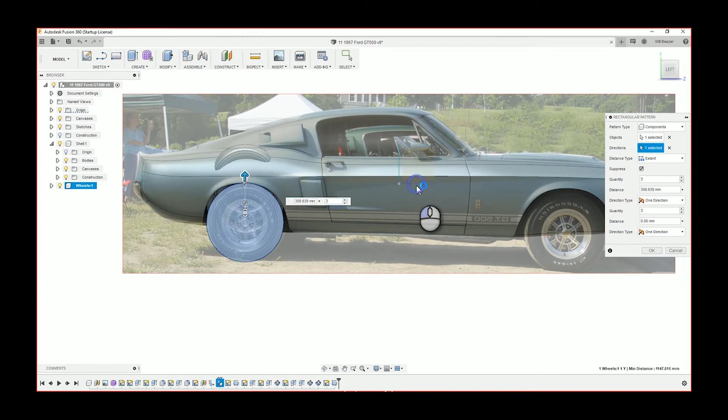This episode is going to have a lot of lessons in it. I made a lot of mistakes.

So, first mistake: when you've created the rear wheel like I have, I've created the rear right wheel, and now what I want to do is create a second wheel that's identical for the front right wheel.

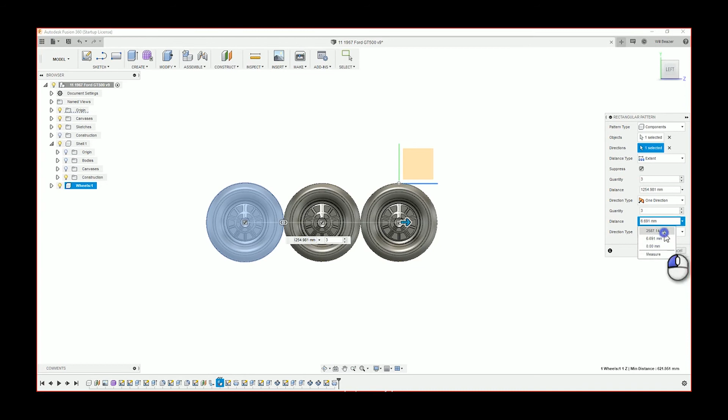So instantly I've gone into the pattern tool, and at the time this was a tool I used a lot, so I just assumed I'd do it this way. I now know that the move/copy tool is a way better tool to use, but I thought I'd show this anyway. I've cut out about 7 minutes of wasted time in this video, so it's cut down anyway, but even this, what I'm doing now, is the wrong way to go about it.

So, what I'm trying to do while I'm frantically clicking on screen is I want to be able to pattern the wheel across in 2 directions. Usually when you click a line, you get an arrow to the right on the axis you've clicked on, and then one perpendicular to it.

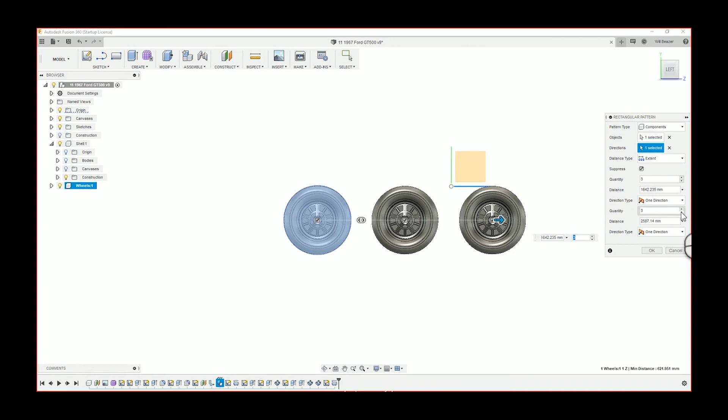In this case, it was actually going away from my point of view. It wasn't going right and up, it was going right and away from my screen, but I couldn't see that, so here I am trying to click up and get it to work. But as I was saying, this is just the wrong way to go about it.

It's just going to cause me more and more issues the more I try this.

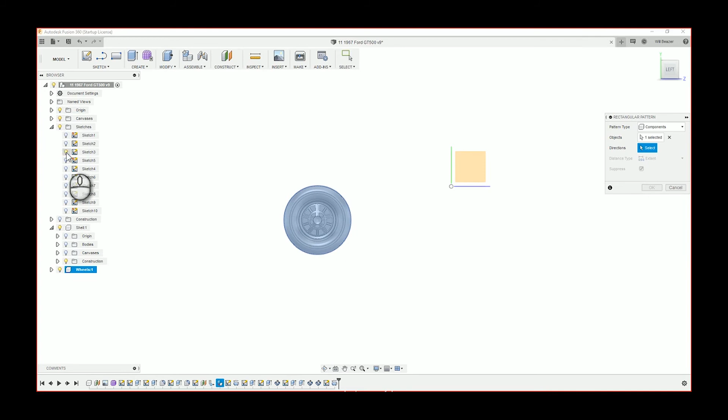At this point in time, I just wasn't really big on the move tool. I'd used it, but I didn't really understand its full capabilities, so whenever I wanted to duplicate something that was near it, I would pattern it. I now know, unless you need a pattern of wheels, that's stupid.

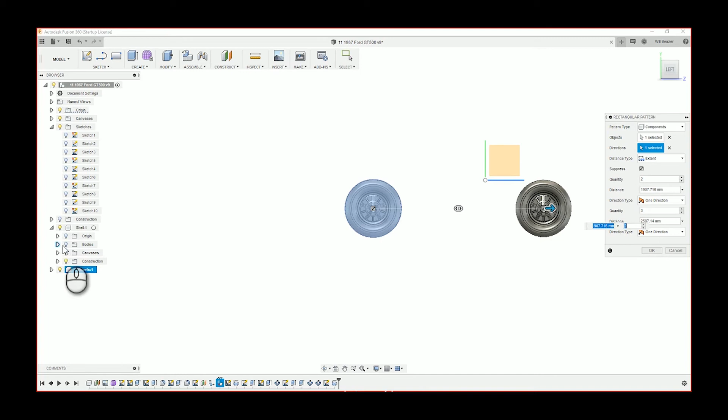But you see why I was having the problem when I turned this canvas back on. As I drag the wheel across, you can see it's actually sitting higher than the wheel on the image, and I want to drag it down as well. Even if I'd just clicked OK now and then moved it, I would have fixed it, but instead I was trying to get it perfectly accurate.

Watching back this video frustrated me, how ridiculously I was going about it.

So in this video, in about 20 or so seconds, I'm going to cut to a video I've just created today, just to explain how I was trying to do it, the actual way I was trying to do it, and the proper way you should do it. I'll be on screen in about 3 seconds.

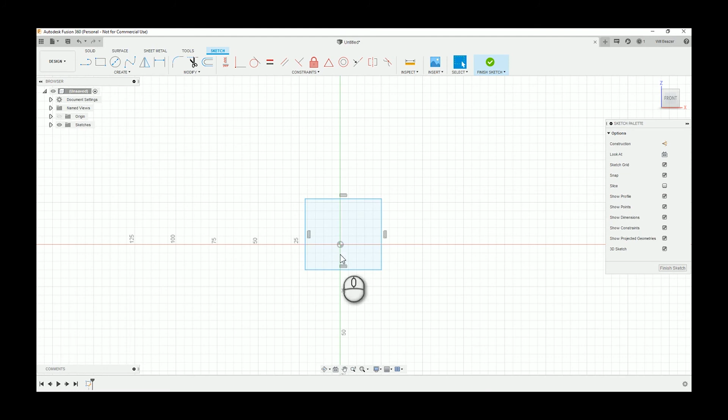So here we go. Right, I've just drawn a blank rectangle, and I'm just going to extrude it into a cuboid, any distance. I'm not looking for a particular measurement, just picture this: think of this cube as the wheel I'm trying to move to the front.

So the way I've been going about it is like this: I go to rectangular pattern, and I then select bodies instead of faces.

What I was trying to do is, by clicking the direction, you'll see I have 2 arrows there, one to the right and one that goes vertically up, and for some reason it wasn't happening in my other model. So what I was actually trying to do is create these.

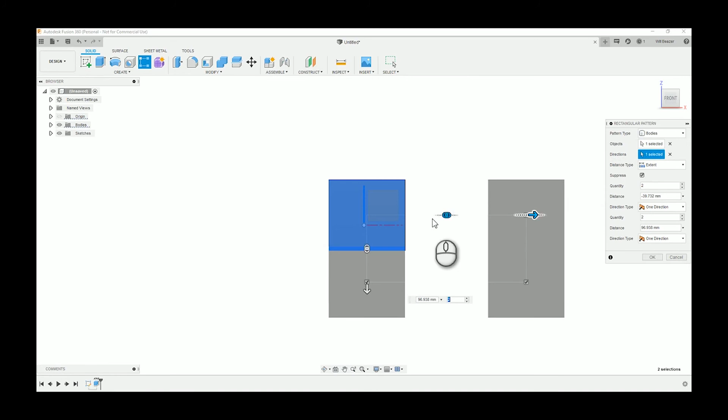So I'll move these cubes across a sec, spread them out a bit more.

Now if you look closely, in the center of the 3 new cubes, there are little tick boxes. If you tick those boxes, it actually turns off the cubes. So you can do a rectangular pattern, but you'll see in a moment. Sometimes they're a bit awkward to click, which frustrates me. But there you go, see how I turn that one off?

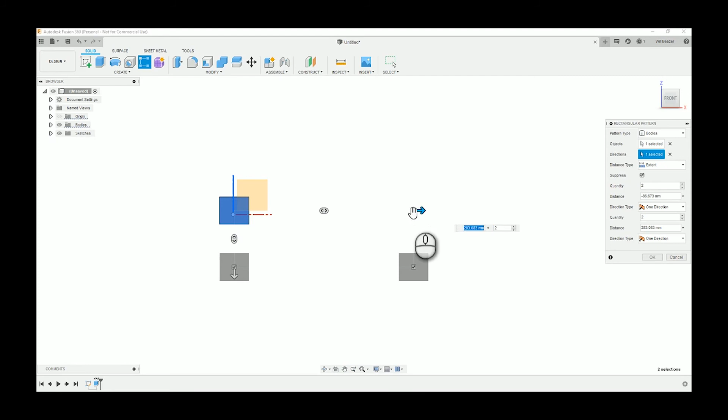And then here I am turning the second one off. A bit frustrating, but there we go.

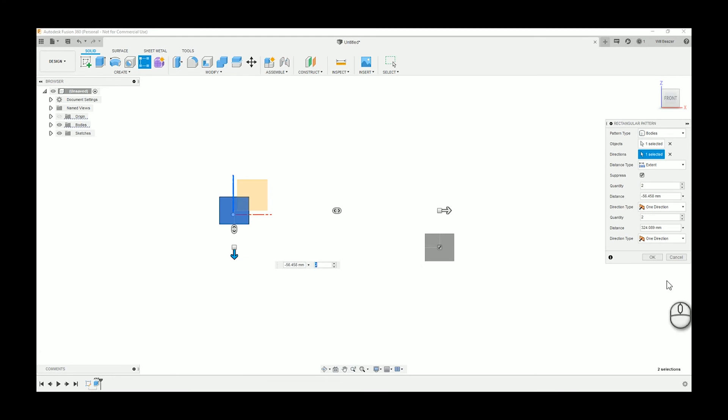So that's what I was trying to do in the other video, in the actual car thing, but it wasn't very successful. So I'll just show you a few clips of what was actually happening in the 7 minutes I cut out.

So that, a bit of that, yeah, pretty ridiculous. Some more there. It was just driving me mad. Yeah, some more there, and finally this.

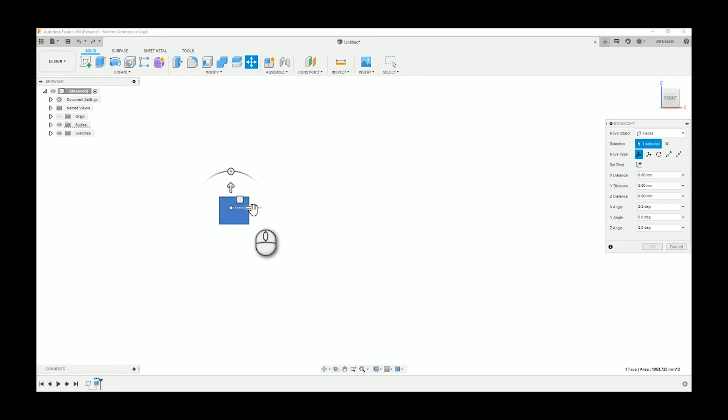So if I go back, we're back with 1 cube. If you click on it, click on the cube, then right click, move stroke copy, then you can drag it across. First thing I should do is it's actually selected to faces at the moment, so I click up there and change that to bodies.

So I click on the cube again. Actually I need to make sure I've got the select tool activated. So now I've got the tool, and at the bottom, see that tick box? Create copy - that's what you want to do.

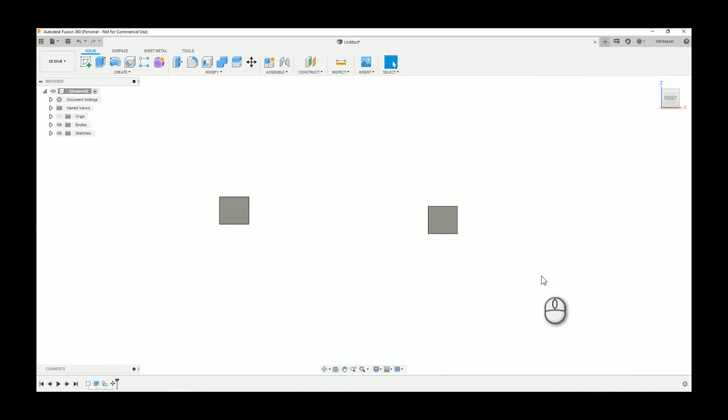Now I can drag this cube wherever I want, and I've created a copy, and that's a much quicker way of doing it. So in total I think I took about 12 minutes patterning and just going insane basically.

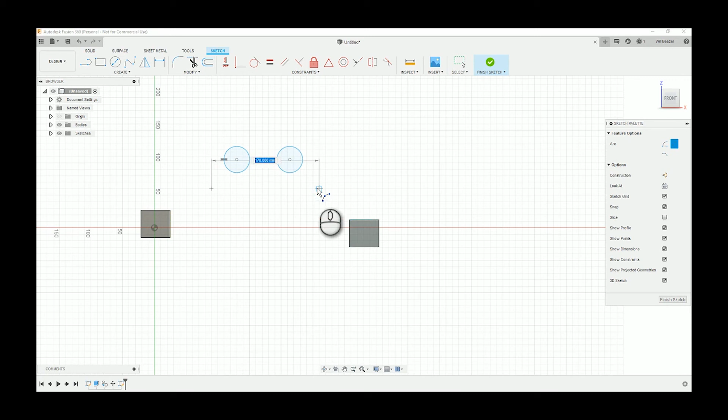Whereas in this video, as you can see, by doing it that way, it takes you maybe 10-15 seconds. So yeah, save yourself some time and be happy like this little guy that I'm quickly just chucking together on screen.

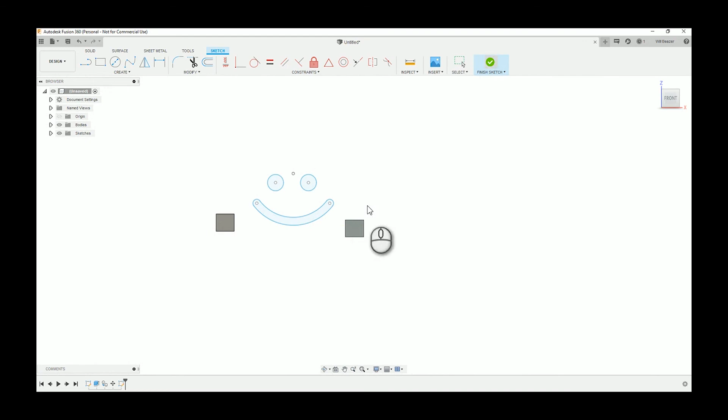But yeah, so use the move copy tool when you're creating that second wheel. If you don't tick the copy box, it'll move the original cube, but you won't have the cube in the first position, so you only have it in the second position. So make sure to click the copy.

But in this video, we're back to what I was doing. This time I've got to a point where I feel happy enough with it. I've kind of solved it. Well, I haven't solved it - I should do the move copy tool, but I figured out a way to do it.

So I just decided to move it until it was like vertically aligned, then clicking OK, and moving that one down.

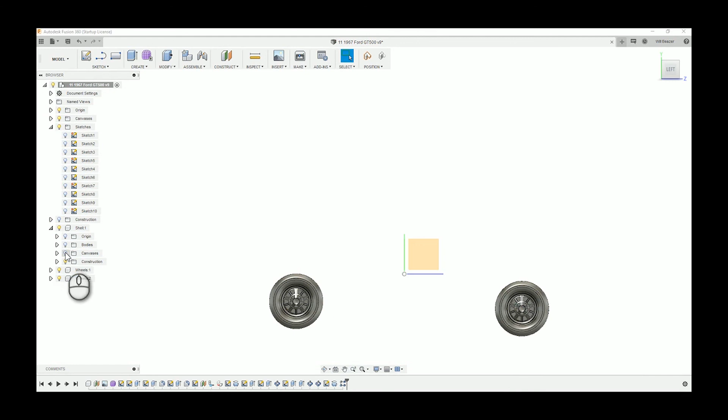And that's basically it. You encounter a few problems with it, but I thought it would be better to show you the way I've done it today rather than show you the 7 minutes of just failures. I mean, you're welcome to watch them, but they're not educational at all, and you'll just think I've gone mental. So we'll leave that out.

So even here, I've just noticed I'm moving both wheels at the same time, and that's because I selected the body, whereas if I'd have selected the component in this tree on the left, I wouldn't have got that problem.

So there we go. Turn the canvas off, put the body on, and there's 2 wheels, with their cutouts.

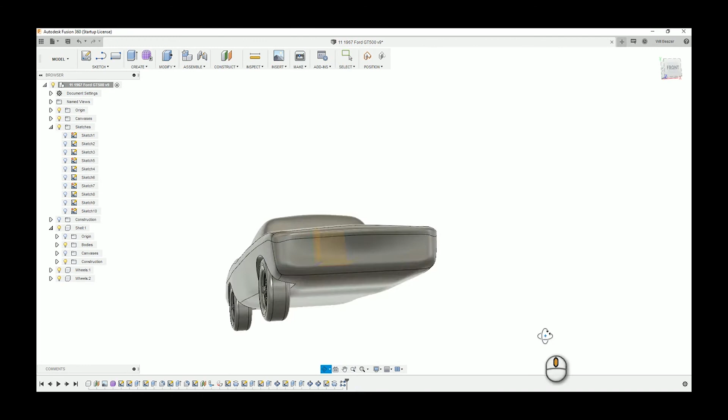So what I want to do now is mirror the arches, the wheel arches that have been cut out.

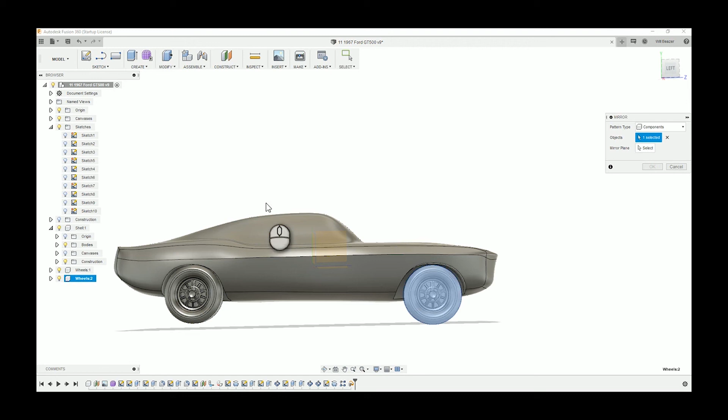When you move something, sometimes you get this - click capture position if everything is exactly how you want it. If you click continue, it'll revert it back, moving that wheel to before I moved it, so it'll be in the wrong place. So if everything's right on screen, capture position.

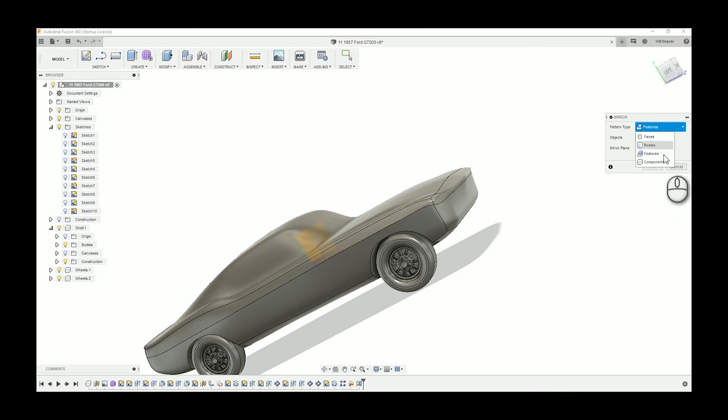So what I want to do now is mirror the wheel arch cutouts and the wheels across to the other side. What you should do is click features, find the cut for the wheel arches, then mirror and use that central plane that divides it, and do the exact same for the wheels except click components. Select those two components, then select the plane in the middle, and there we are.

Click OK. Mirrored across. Anyway, I know this was a short video, but I hope you enjoyed. Thanks for watching.